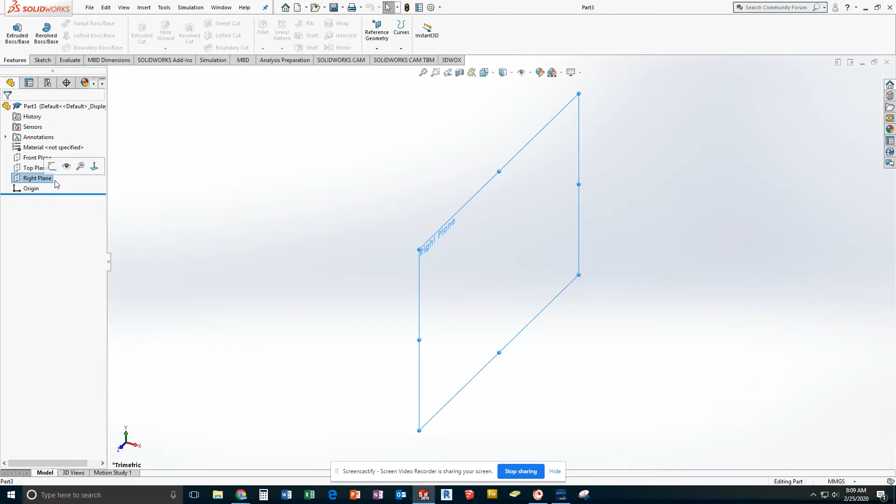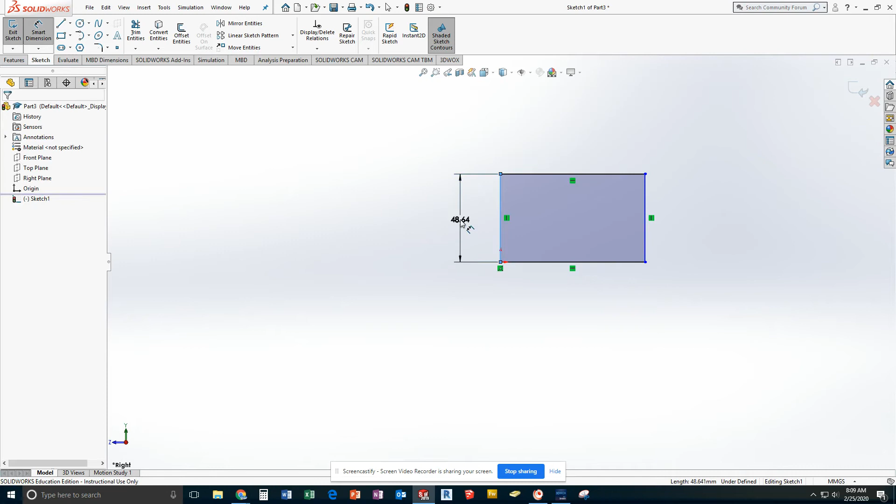So I'm going to actually start my sketch this time on the right plane. Follow along, please. Make sure you start on the right plane and start your sketch. Make sure it says right plane here. As I draw my initial rectangle, make sure you start from the origin and go up and to the right. I am going to ask for mass properties on this later on, so make sure your origin is in the proper spot. I'm going to make this 25 millimeters tall and 50 millimeters wide.

Once you've done that, you can click Exit Sketch, go over to Features and Extrude Boss Base. Now I'm going to zoom out a little bit because we're going to use a different style of extrude. This one is going from my drawing to the right, the full distance that is set right now at 10 millimeters. I'm going to change this direction 1 from blind to mid-plane.

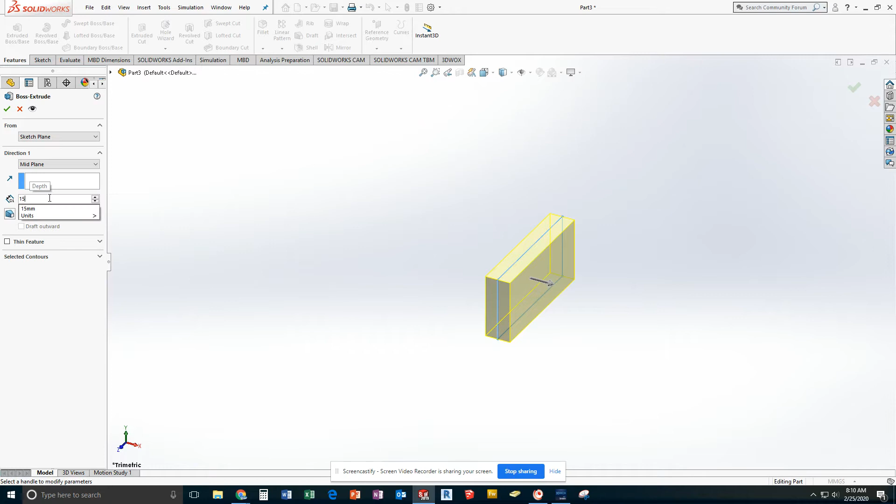What you're doing now, you can see the blue outline is the place where you actually drew your rectangle. And it's going, in this case, since the distance that's set is 10 millimeters, 5 millimeters this way and 5 millimeters that way. The distance I need is 150 millimeters, so that means it went 75 millimeters in this direction, 75 millimeters in this direction. And I'm going to go ahead and accept that.

I have now the base of mine. And if I go to View, and I go to Hide Show and I turn on my origin, you'll notice the origin is in the middle of the edge. That's a dead giveaway. If you ever see something that you need to draw and the origin is in the center, they probably started with this mid-plane extrude.

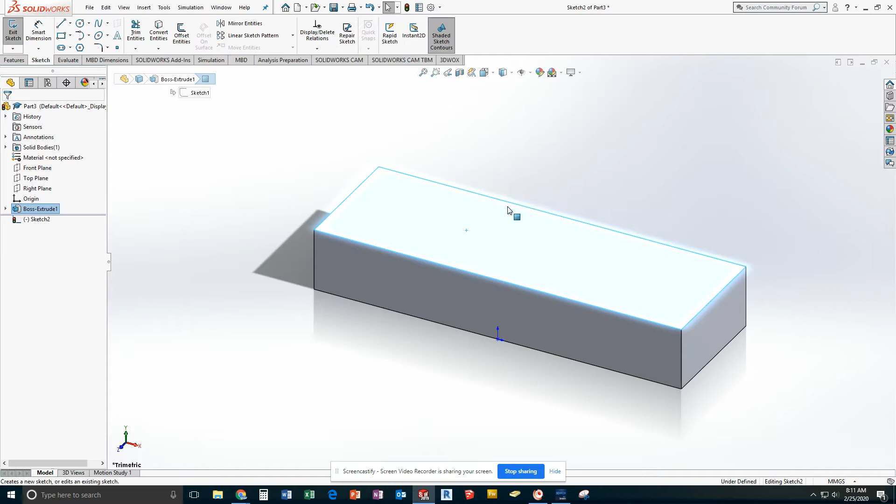All right, so now I'm going to click on the top of this and start a sketch. If you'd like to, you can go ahead and use one of your display tools to turn to see the top. But what I'm going to do is just place, I'm going to start from a corner. I'm going to come down and make sure I'm coincident on an edge. That's what that yellow thing told me. And then the only dimension I should need is the fact that I want this to be 50 millimeters wide. Okay? That should make me fully defined, which it does.

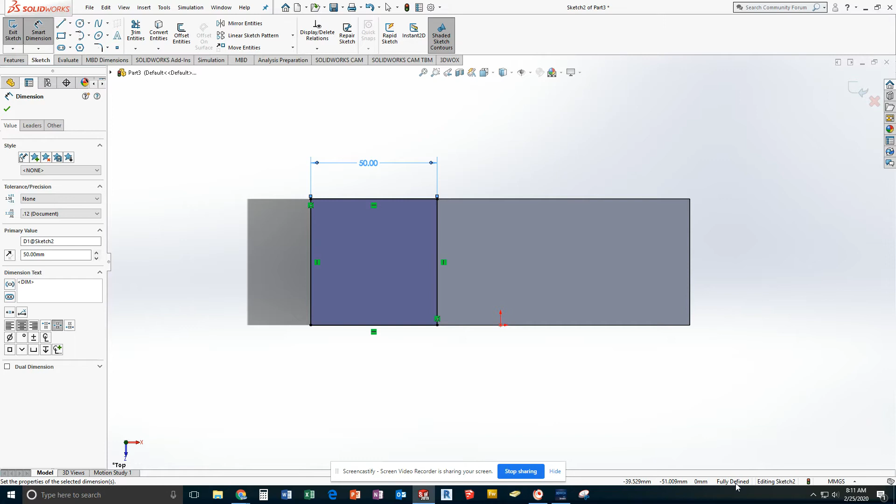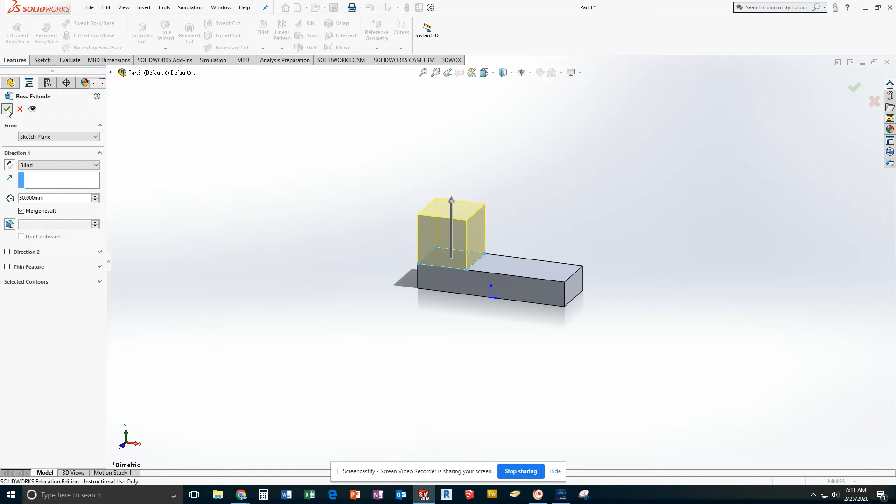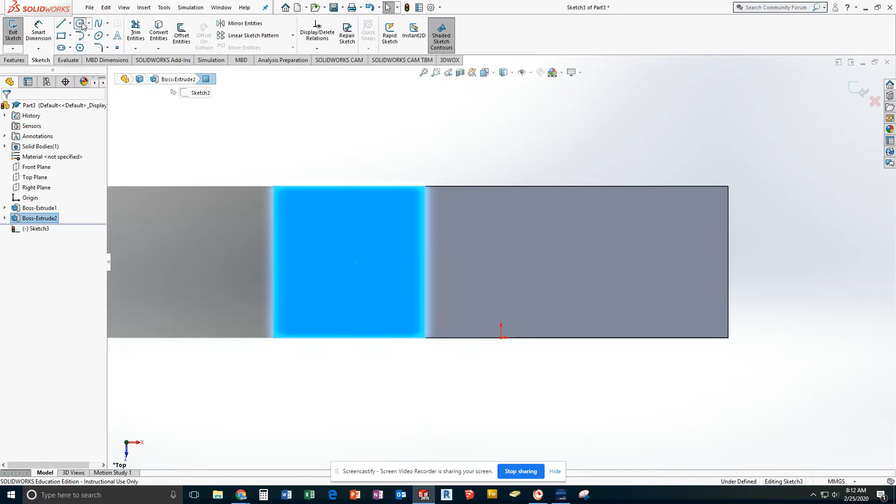Now, on the top of my cube, I want to make a post that sticks up. So I'm going to click on it. And again, if you want to, I believe it's Control 5. Yes, Control 5 is what switches to the top view. Start my sketch, draw a circle.

I'm going to go ahead and use Smart Dimensions to actually, I'm going to show you a different method. If I dimension this circle and then change the shape of it later, I'm going to have to come back and change those dimensions. If I want to always have my circle centered on this box, regardless of what size it is, here's a trick.

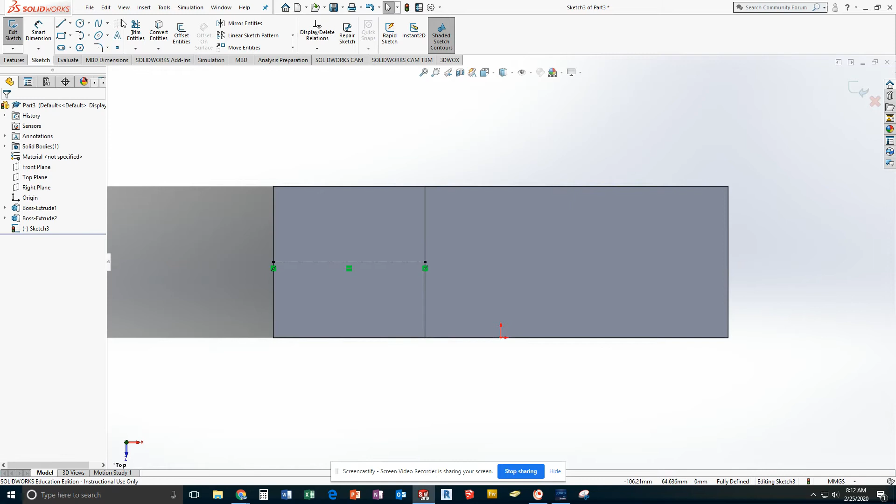I'm going to get a center line. That is under line. I'm going to find the midpoint here shown by this orange dot and draw straight across to the midpoint of the other line. By doing this, I now know that the exact center of this is the midpoint of this center line. So the only dimension I actually need to put on here is that I want this to be 20 millimeters in diameter.

You'll notice I'm fully defined, and that is done through relationships. The center line runs from the center of this to the center of this, and it keeps it centered here. So if I changed how thick it was, this line would just move because it would stay on the midpoint. If I changed how big it was in this direction, the line would get shorter, the center line would get shorter, and this would stay in the center.

So this is a way that you can align something in the middle, and if I change the size of this feature later on, all I have to do is maybe change the diameter of it. So that may help you. I'll show you another version of that when I cut a hole later on.

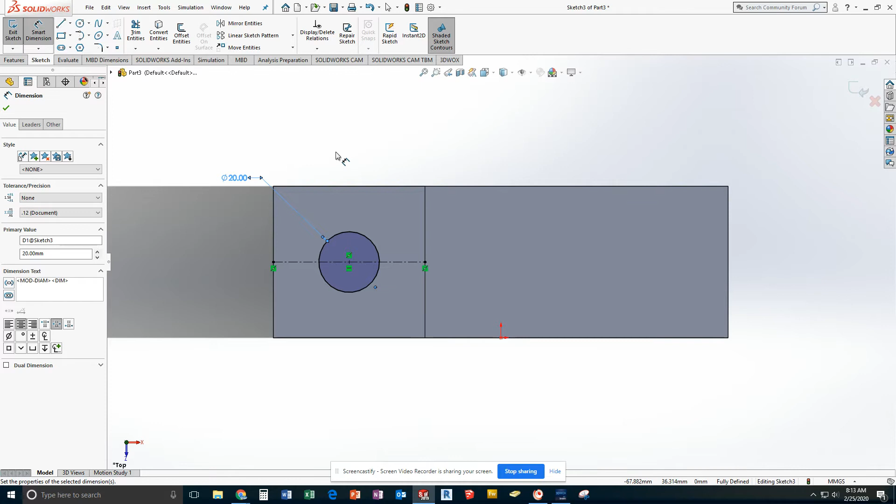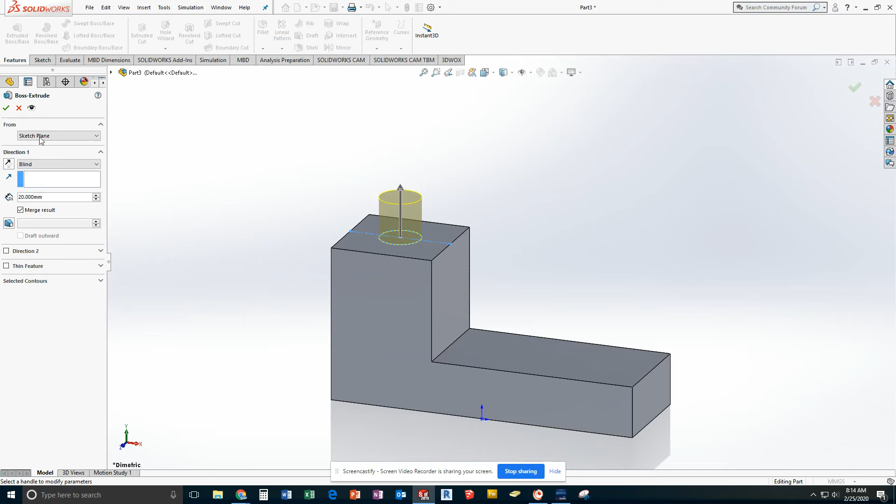So I'm going to go ahead and hit Exit Sketch, Features, extrude boss base, go to my isometric view. For whatever reason, while you're extruding, the control number keys don't work. So I'm going to make this, it's fine for it to just be 20 millimeters tall. And accept that. I'm also going to click this side, click a sketch.

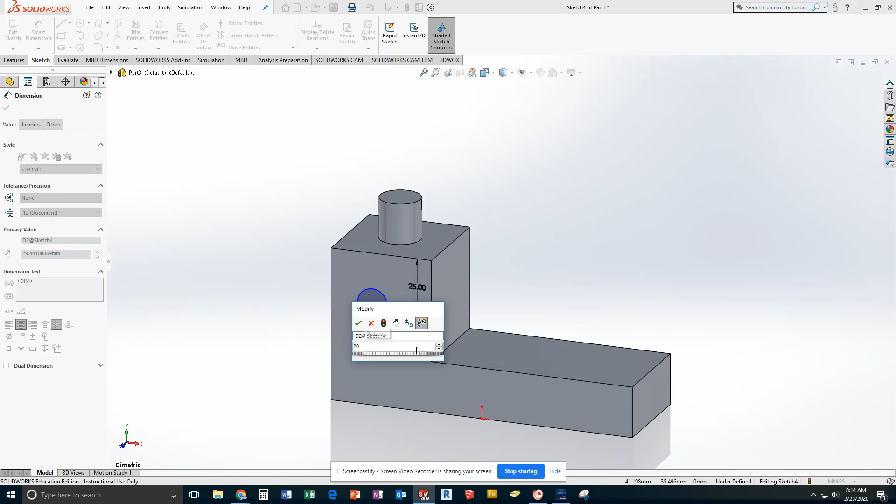And put a circle on here. This is what I am going to just go ahead and use dimensions for. I'm going to bring it down 25. I am going to bring it 20 millimeters from the inside edge, and I am going to make it 15 millimeters in diameter.

This is fully defined. I'm going to exit my sketch and go ahead and extrude cut. My selection for an extrude cut is normally a distance, but in this case, I want it to go through the entire thing. So I'm going to go ahead and drop this down and say through all. That should put that through all. And again, if I come back and change how wide this is, it won't matter.

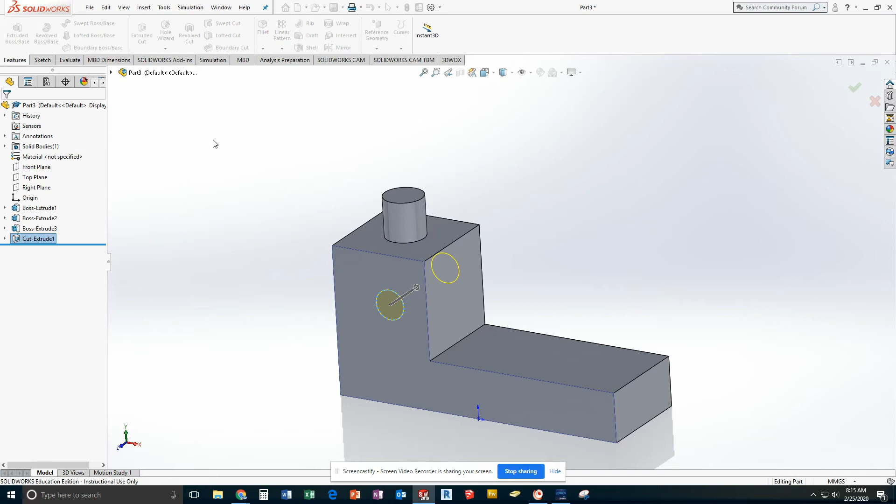Now I've got features on here that I want on the other side too. This is where I can use mirror. So when I pick mirror, the first thing I have to do is pick a mirror face or plane. Now I can't actually click on the right plane, which is what I need right now. I can drop this down though and find right plane in my list. Okay, so this is my mirror plane.

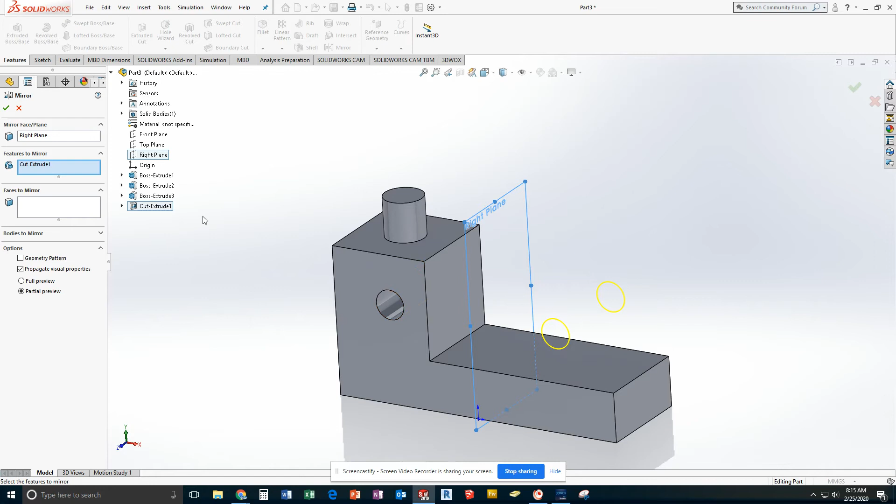You can see it already picked my extrude cut. It's trying to mirror the cut over here. Well, I'm going to need more than the cut. I'm going to need the extrude at the top. I'm also going to need the base extrude, which is the cube. So I've selected all three features in one mirror. So then when I accept it, I've now got two copies.

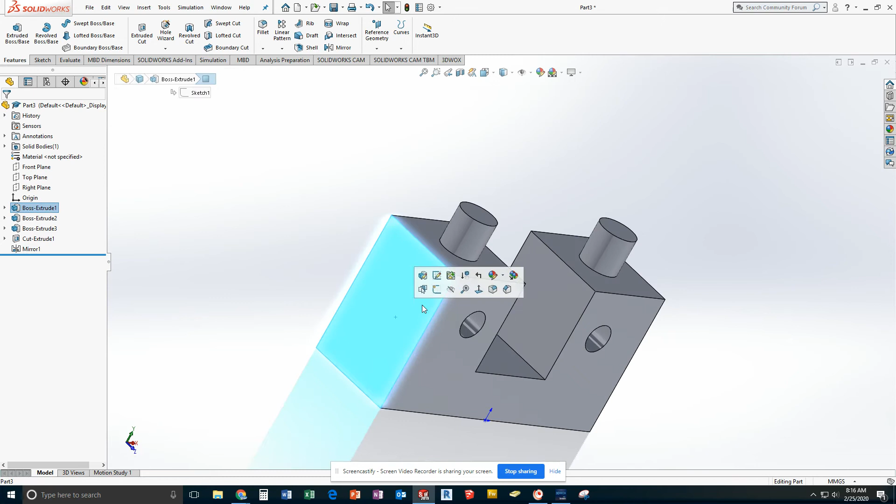Now that doesn't mean they're linked, however. So if I pivot around to this face here and start a sketch, I can make a box. I'm going to go ahead and dimension this box from the edge. So this is also where if I made a change later on, I don't just have this box dimensioned into a location. I have dimensioned it by relationship to all of the outside edges.

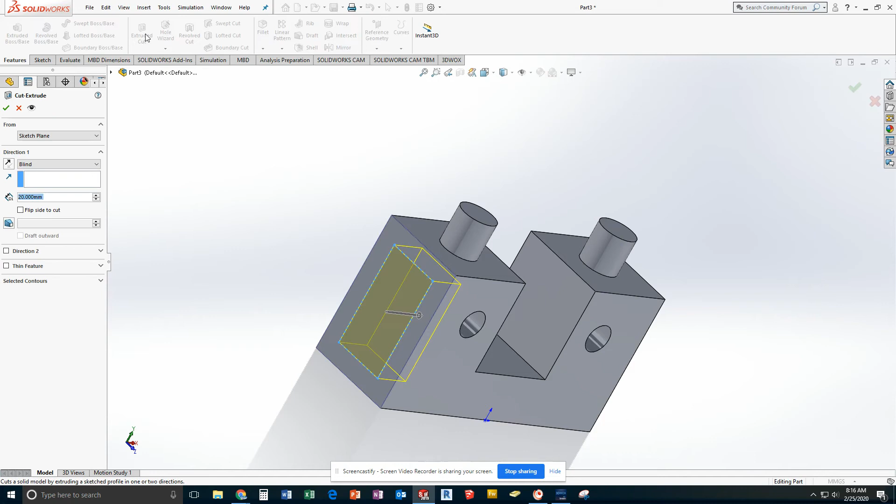So basically, I'm using a 10 millimeter border, essentially. If this box got wider, this feature that I'm making would also get wider. So I'm going to go ahead and exit that and extrude my cut. Now I already have some features in there, so I'm being careful not to go too deep. So I'm going to say 5 millimeters. After extruding my cut 5 millimeters, you'll notice I have this cavity here, but it is not on the other side because I didn't mirror that feature.

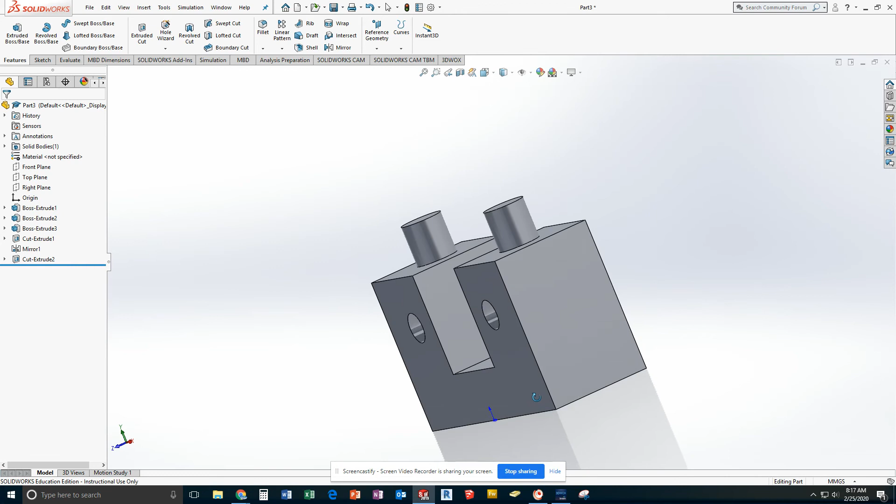I could have actually drawn this first and then mirrored everything else, not this, and gotten the same result. So just so you're aware, you can do things differently. Now, I know that's advanced versions of stuff we've done before. Now you have a layout, or now you have a block where we can do all sorts of new things.

So the first thing I want to show you is fillet. Fillet allows you to round edges and corners.

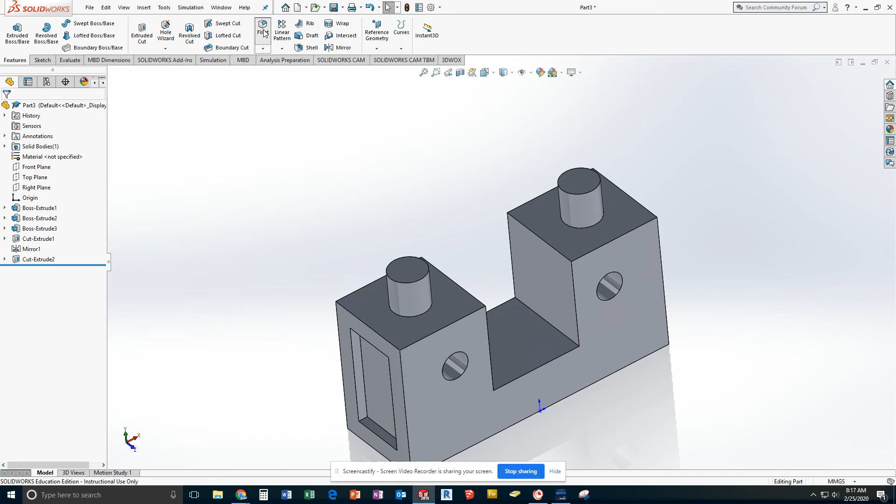The first type we're going to use is just your standard fillet. When I click on an edge, say this edge right here, it rounds that corner. By the way, if you don't see full preview, turn that on - that's really helpful. Now you can see that's a lot of rounding.

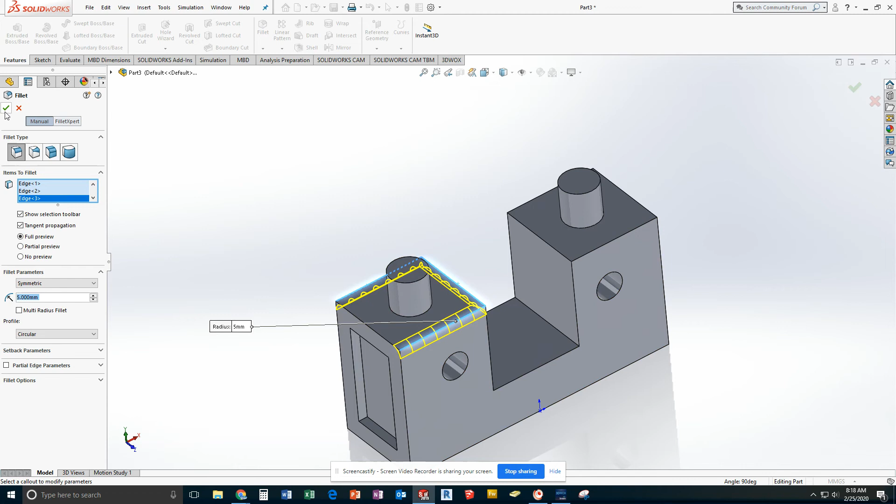So for the purpose of this, I'm going to change my radius down to 5 millimeters. You can change whatever you need to change. You can also add multiple radii, so I can pick all three sides of this part, and when I select it, it rounds all three sides.

I can also do very simple things like round the top of this so that the peg sticking up is better. Now if I round that and it's too round, I can edit it, come back here, and change 5 to 2 millimeters, because maybe that's more of what I'm looking for.

I can also do it in areas where you have a corner that meets, and you want to round it and kind of blend these two surfaces. In this case, instead of removing material like I've done the last two fillets, when I hit this fillet, I'll go ahead and leave it at 2 millimeters, and I'll actually add material. If you're going to do this in some places, this actually makes this pin stronger - it's a lot less likely to break off.

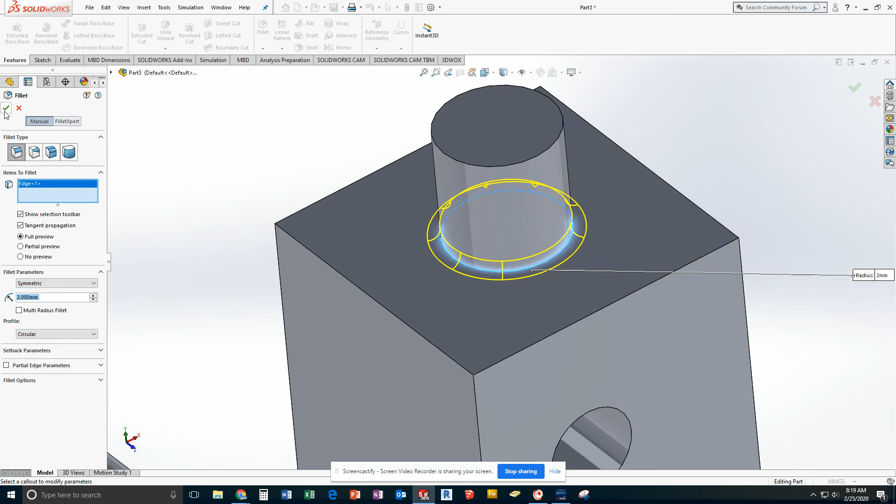I can also do it at the opening of a hole. So if I want to, I can fillet this edge right here, which again removes some material.

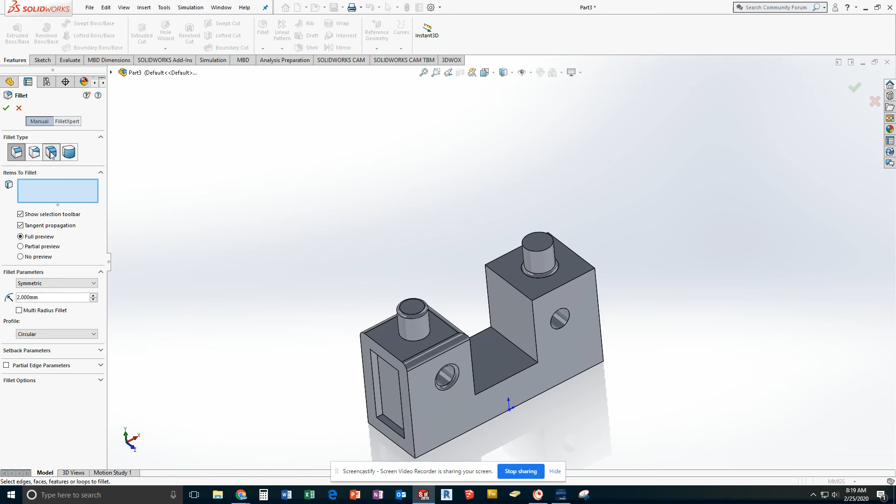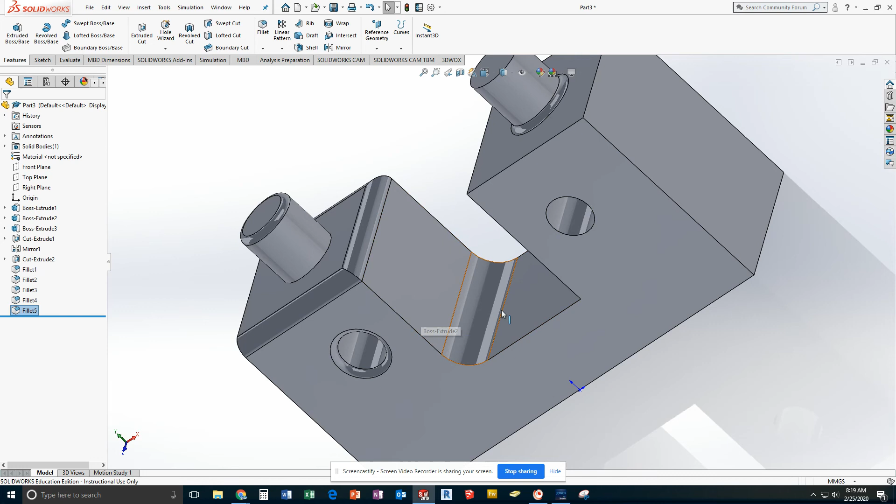Now I want to show you two advanced fillets. I'm going to use this one down here, the third one that's called a face fillet. So what I do is I can say I want you to take this face and fillet it into this face, and I have a setting down here that I can set at whatever I need to. Now, could I have done that with a standard fillet? In this case, yes, but sometimes the face fillet, especially if the faces are complicated, will give you a better result doing it that way.

Just so that we are clear, I can use mirror, and I can use my right plane again to mirror that fillet feature over. You can decide which one's easier or harder - sometimes you get it, and sometimes it doesn't want to work. So I'm going to keep moving on though, because I know this video will get long.

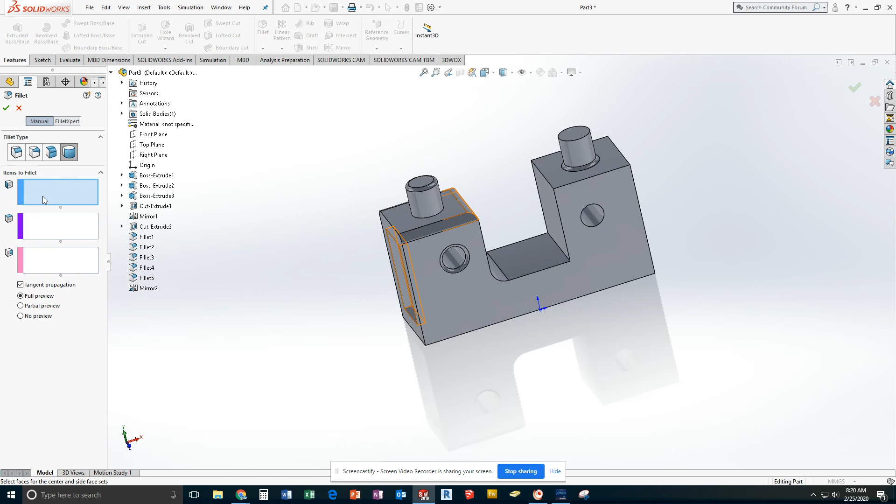The other one I want is a full round. What this does is it allows you to select three faces to make a full round fillet. The blue face is one of the sides, the purple one is the side that will actually go away, and the pink one is the opposite side. So when you click those, you can see that I've selected to do this full round fillet, and when I do that, it does start to ever so slightly round away where my corner was, which is fine.

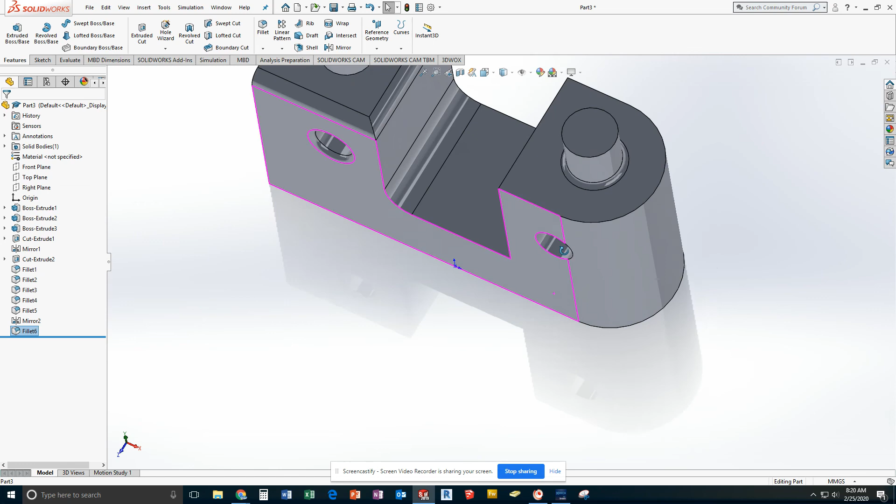Now another version of fillet is chamfer. Chamfer does the same thing as fillet, but instead of being round, it just cuts it off. So I can set it by distance and degrees. You can also change it so I can set it at a distance and a distance. There's some other advanced features, but for most times, we're either going to use distance and angle or distance. In this case, it's set at 3 millimeters, 45 degrees. As you practice, go ahead and mess with those.

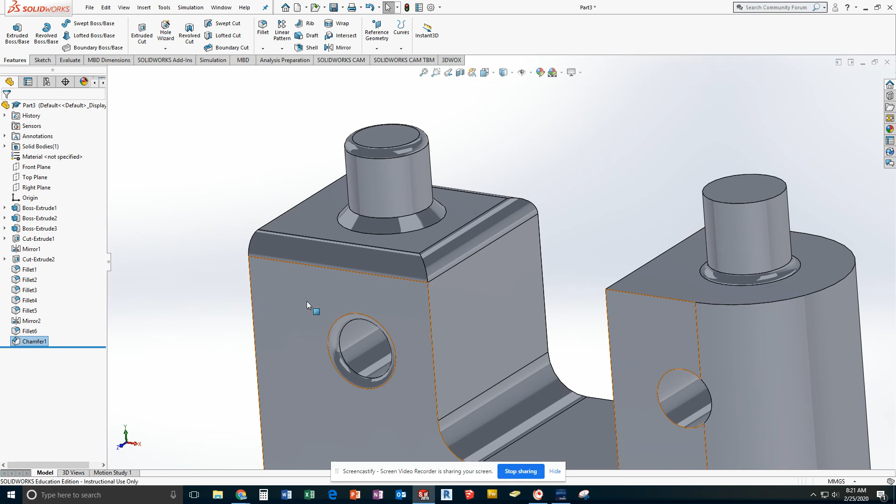Just like we did with fillet, I want you to do a bunch of different types of chamfer. So I'm going to go ahead and do the bottom edge of this one, where you can see the difference between the chamfer on the bottom of the pin and the fillet. Do the same thing, picking an edge, picking some of these edges, maybe try the top of your full round chamfer. Go ahead and go around, and I want you to make sure that I have no unfilleted or unchamfered edges by the time you are done with this part.